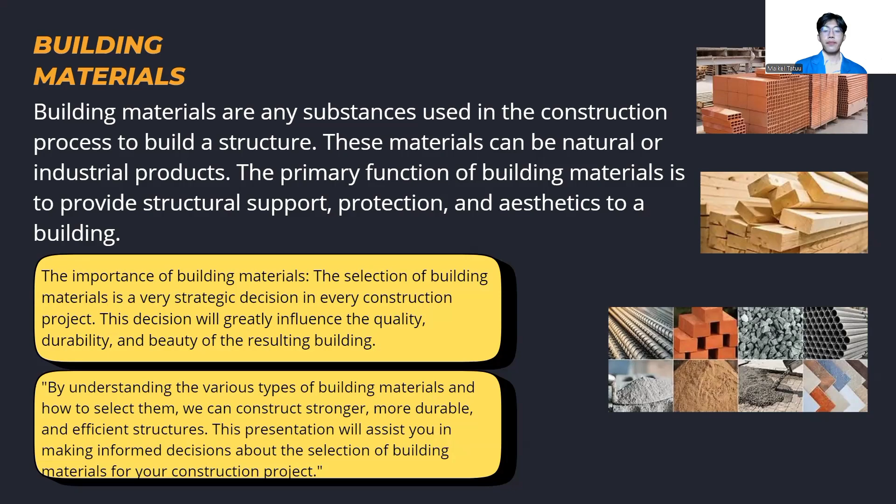By understanding the various types of building materials and how to select them, we can construct stronger, more durable, and efficient structures. This presentation will assist you in making informed decisions about the selection of building materials for construction projects. We are entering the main topic, introduction and classification of building materials. In construction we have natural building materials and artificial building materials. So what makes natural building materials and artificial building materials different?

Natural building materials are those directly obtained from nature without undergoing complex manufacturing processes. The general characteristics of these materials include sustainability, weather resistance, and often high aesthetic value. Advantages of natural building materials: environmentally friendly. Natural building materials are more environmentally friendly because most of them can be obtained directly from nature without industrial processes that cause pollution. In addition, these materials are often recyclable or decompose easily in nature.

And the next is relatively low cost. Many natural building materials can be obtained at a lower cost, especially if the natural resources are available locally, reducing shipping or transportation costs. And next is availability. Natural materials such as wood, stone, and earth are generally easy to find in many areas, making them more accessible compared to modern building materials that often require manufacturing and distribution processes.

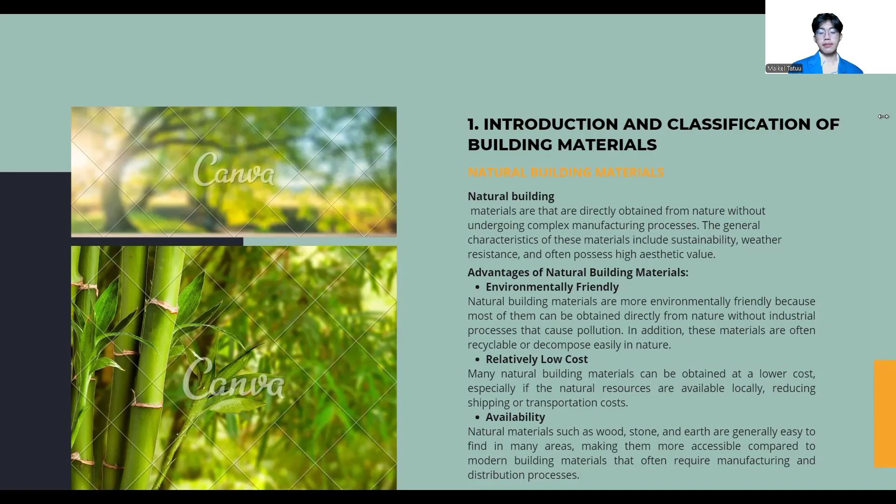Here are some examples of commonly used natural building materials. First is stone. Stone is one of the oldest natural building materials. It has been used as a foundation material for walls, floors, and other building structures. Some commonly used types of stone include bricks, andesite, limestone, and marble. The second is wood. Wood is used in various building elements, including roof frames, walls, floors, and beams. Wood is relatively lightweight, easily obtainable, and easy to process. Types of wood commonly used for construction include teak, meranti, and pine.

The third is soil. Soil or clay is often used as a natural building material in the form of bricks or eco-friendly walls. In some cultures, clay or soil is used to make walls for traditional houses. The fourth is bamboo. Bamboo is a very popular natural material in tropical countries. Due to its lightweight yet strong properties, bamboo is often used for roof construction, walls, and even larger structural building materials. And the last is sand. Sand is a natural material used in the manufacture of concrete and mortar; sand is a very important raw material for construction.

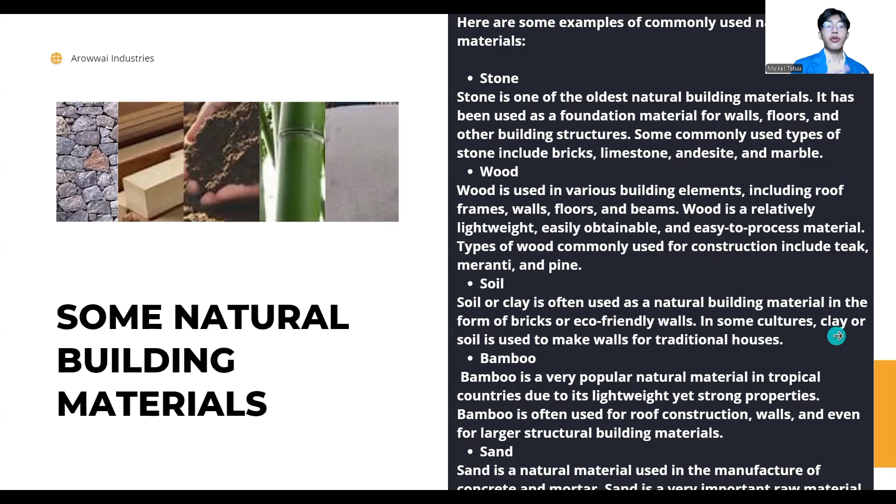And we're entering artificial building materials. These are materials that are sourced directly from nature and used in construction without significant industrial processing. These materials often have a lower environmental impact compared to man-made materials. Cement is an artificial material, and its production process starts with raw material mining. The mined ingredients are limestone, or calcium carbonate, and clay.

The next is grinding and mixing. Limestone and clay are ground together into a fine powder and mixed with additional materials such as silica sand or iron ore. Heating process: the mixture is heated in a kiln at a temperature of around 1450 degrees, forming clinker. And the next is final grinding.

The clinker is cooled, finely ground, and gypsum is added to control the setting time of the cement. Next is packaging. Cement is packaged in bags for distribution, with product examples such as Portland cement, Pozzolan cement, and slag cement.

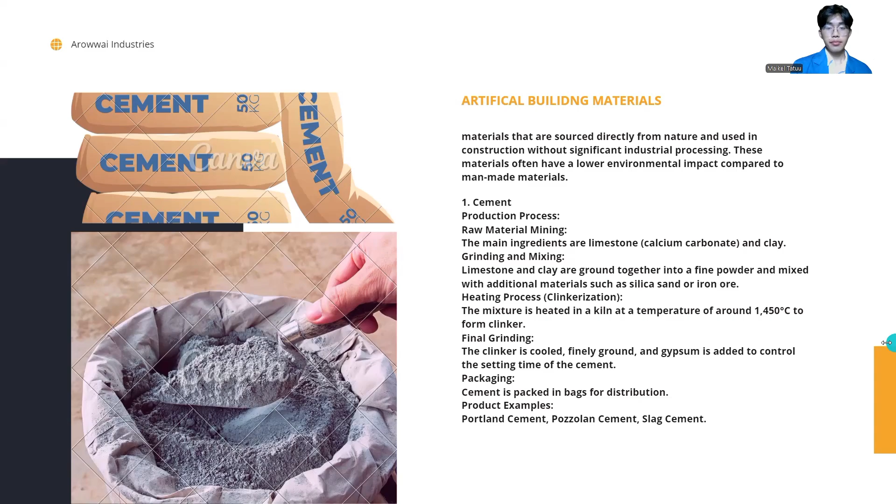The next artificial building material is ceramics and tiles. Manufacturing process: raw material preparation, where clay, kaolin, and other mineral materials are processed into slurry. Next is forming, where the slurry is formed through molding or pressing, then drying and firing in a kiln at high temperatures.

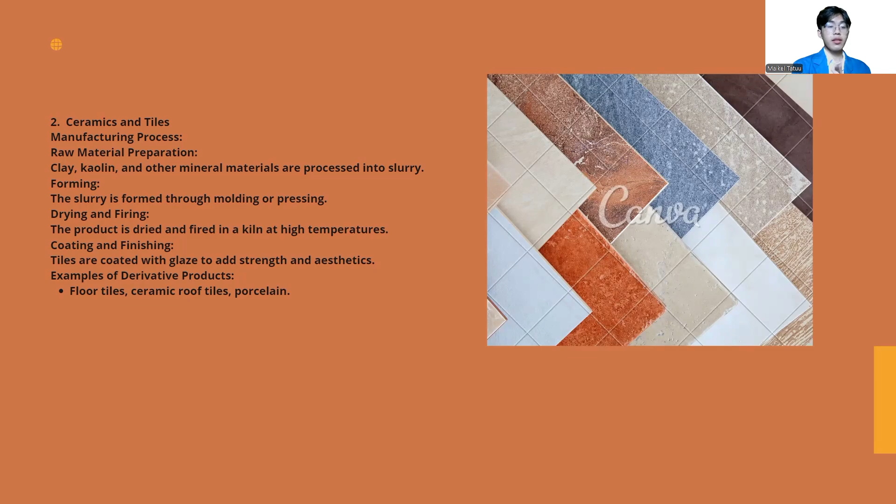Coating and finishing: tiles are coated with glaze to add strength and aesthetic. Examples of derivative products include floor tiles, ceramic roof tiles, and porcelain.

Next is main building materials and selection factors: cement, sand, and gravel function in concrete mixture, and red bricks, reinforced concrete, and wood, their use and characteristics.

The first is cement, which functions as a binder that sticks sand and gravel together when mixed with water, and provides high compressive strength after hardening. The second is sand.

As a fine aggregate in the concrete mix, sand provides structure and fills voids between gravel, ensuring a smooth and even concrete surface.

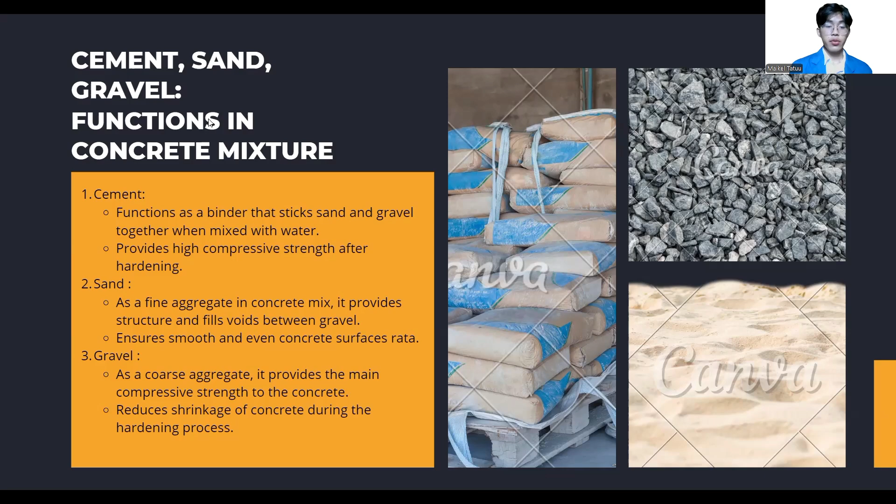The third is gravel. As a coarse aggregate, it provides the main compressive strength to the concrete and reduces shrinkage of concrete during the hardening process.

Next is red brick, reinforced concrete, and wood use and characteristics. Red bricks are used as a material for building walls, are fire resistant, and provide good thermal insulation. Characteristics of red brick are strong, durable, easy to install, but heavier than alternatives such as lightweight bricks.

The second is steel bar, used as concrete structure reinforcement in the construction of beams, columns, and floor slabs. Characteristics of steel bar are strong tensile strength, flexible forming, and high resistance to loads.

The last is wood, used as a structural material such as roof frames, doors, windows, and furniture. Characteristics of wood are easy to shape, lightweight, and aesthetic, but susceptible to termite and moisture attacks.

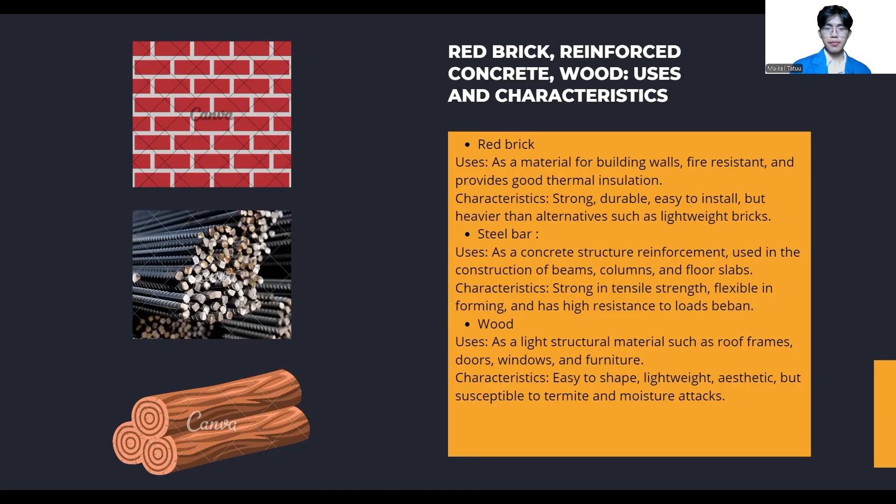Next is complementary materials. Mortar is a mixture of cement, sand, and water used to bond bricks or ceramics.

Plaster is a mixture of cement or gypsum used to cover the surface of the wall, providing a flat and smooth result. Paint is used to coat the surface, providing protection and aesthetic to walls or building structures. Another complementary material is ceramic adhesive for installing ceramic tiles.

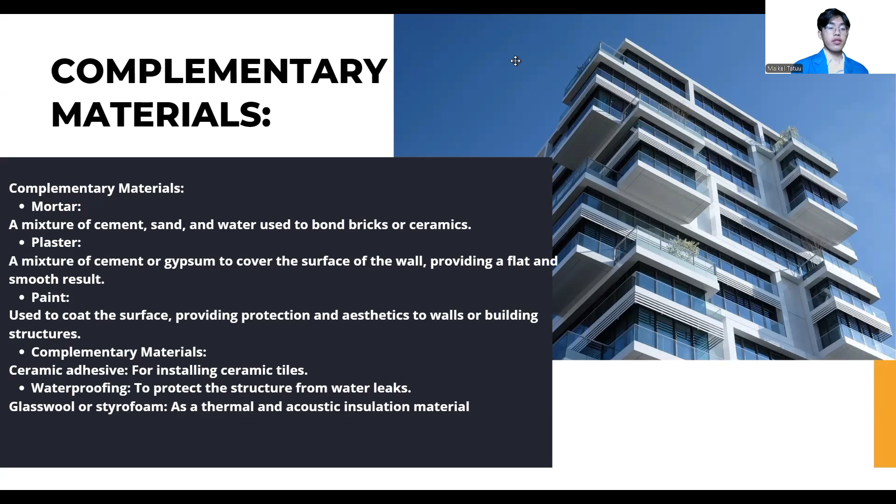Next is waterproofing materials, which protect the structure from water leaks, and glass wool or styrofoam as thermal and acoustic insulation materials.

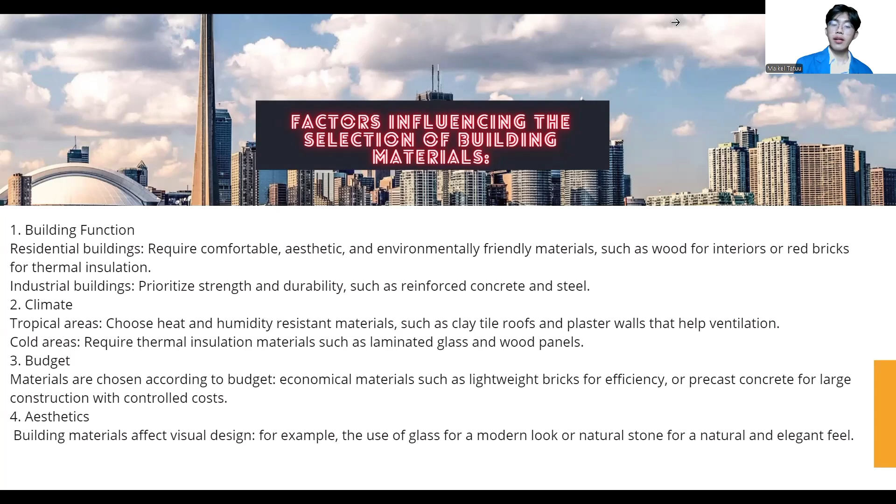The last factor is aesthetic, which affects visual design. For example, the use of glass gives a modern look, or natural stone gives a natural and elegant feel.

So the last part of my presentation is the conclusion. Main building materials such as cement, sand, gravel, red brick, reinforced concrete, and wood each have their own specific function and characteristic in construction.

The importance of selecting building materials: choosing the right materials ensures a sturdy building and encourages continued innovation and learning. The role of construction continues to develop with new technology and building materials. Let's continue to broaden our insight on building materials innovation to produce more efficient, environmentally friendly, and high quality buildings.